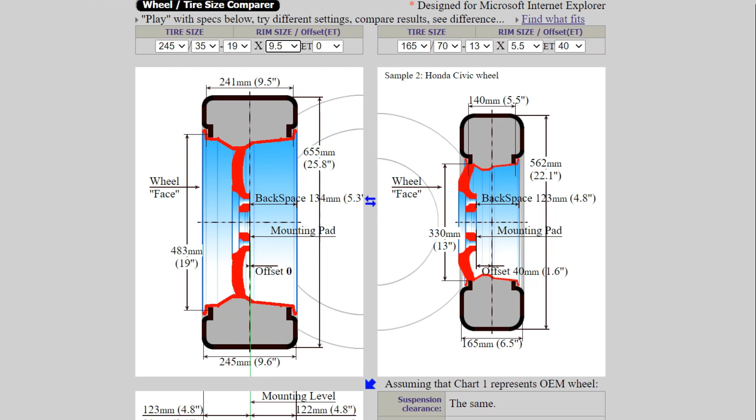ET — this is what we call offset. A lot of times you'll see 0, 35, 50, things like that. When it's at 0 offset, if you see this line right here, that's 0 offset. It's in the dead center of the wheel.

What happens when we do this? Let's go to -20. You see how that moved? The center portion, where the wheel actually meets the hub, is now inside the wheel more, which in turn pushes the wheel itself out more. Now if we go to the positive number, it does the exact opposite — we're actually 20 millimeters out more, which pushes the wheel 20 millimeters in more.

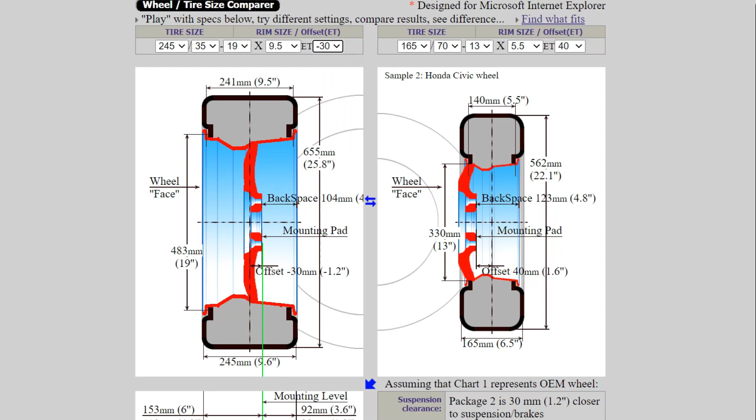I'll show that again just in case it's confusing. So 0 is center. If we go negative, let's go -30 this time — that's 30 millimeters in more where the wheel actually mounts to the hub, which results in the wheel sticking out 30 millimeters more towards the edge of the fender. If we go positive, it's the exact opposite: the center of the wheel, where it meets the hub, goes to the outer edge of the wheel more, which ends up pushing the wheel inside the fender more.

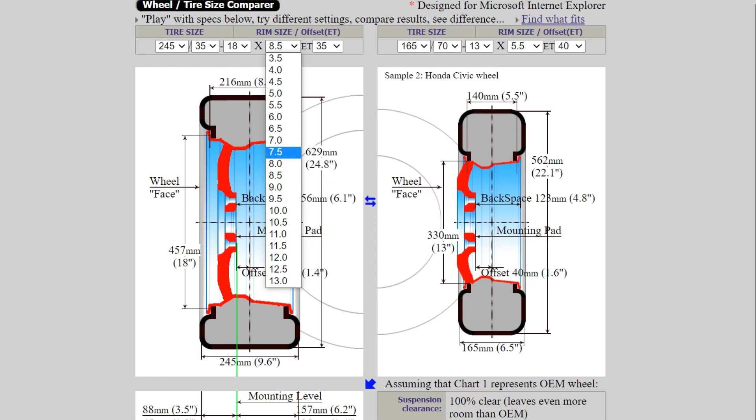So let's say this is your vehicle right now, and your OEM setting — the most common setting would be about 18 by 7.5 with 225 tires on it. Pretty common size. Now you want to put some 19s on your car. How do you go about doing that? Let's go to the right here and take a look at what we can do. First thing we can do is put 19 in it.

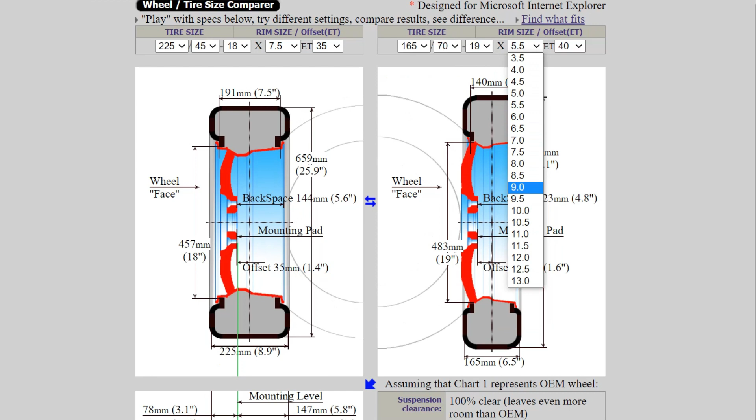You want to jump up an inch on the width, right? You're doing an aftermarket wheel, so might as well go a little bigger. But now you got to figure out what tire size you want. So let's see, we plugged in a 30 sidewall on a 225. We're off quite a bit on the overall diameter of things.

So let's see, 35, 40. Notice this right now, the tire size, 225/45 versus 225/40. If you read it up to just here, the tire on the left should be taller, right? But the tire on the right is actually taller because it's on a 19-inch wheel versus an 18-inch wheel. So 25.9 inches tall versus 26.1 inches tall.

So if you want to put it on a 19, notice how we went down by 5% on the sidewall. That's going to be probably your closest bet, because if we did a 45, just like we did on the OEM sizing here, you're jumping up by almost a little over an inch on the sidewall, and you'll run into rubbing issues and, of course, the speedometer issues as well.

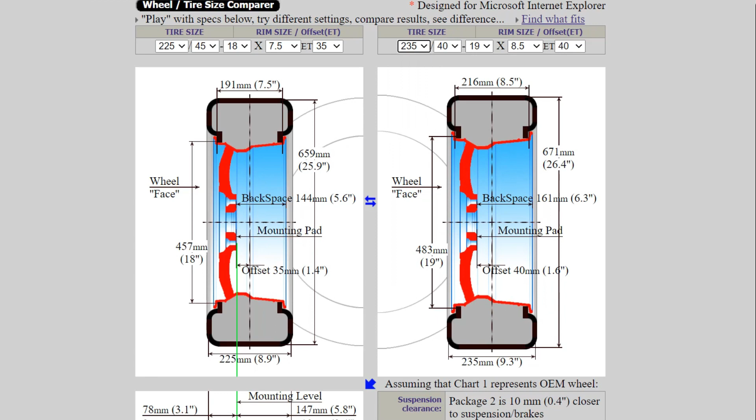So now this also changes. Let's say if we decide to go a little wider on the tire, so we decide to go to 235s. Now because it's 40% of 235, look how much the overall diameter has changed.

So maybe it's time we jump back down. Hey, look, now we're actually smaller than OEM. You think we can go a little higher? 245/35/19 is now as close as you're going to get.

Okay, so right now the perfect size for upgrading your 18x7.5 to 19x8.5 would actually be going a little wider on the tire, 245, and actually smaller when it comes to the sidewall, to a 35% instead of 45%. So overall diameter, you're looking at 25.9 on the OEM. The new setup is going to be 25.8. So your speedometer and everything should be very, very close.

So if we scroll down here, it'll tell you exactly what it's going to be. So when the speedometer reaches 60 miles per hour, actual speed will be 59.6 miles per hour, 0.7% off. So basically your speedometer will work the way it was intended.

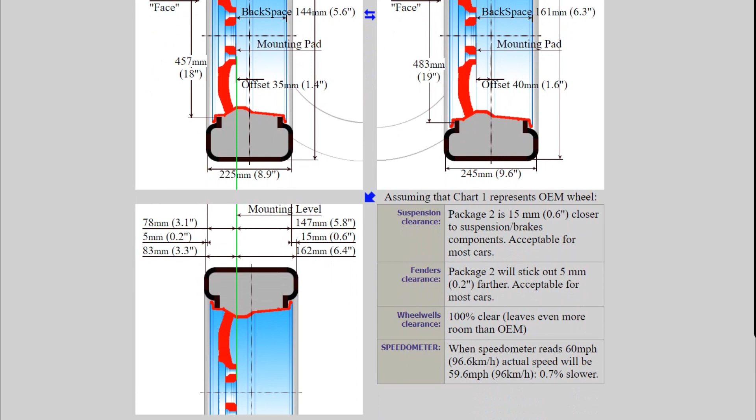Now, if you look here, it also tells you right now the package 2, which is the wheel that we did on the right side, is 15 millimeters closer to the suspension and brake components, which is acceptable for most cars, and that happens because it's an inch wider than the OEM wheel. It says it will stick off 5 millimeters further. Let's say you actually want the wheel to stick off 15 millimeters further.

So you look at your offset here, we're at 40. So in order for 5 millimeters to get to 15 millimeters, we need 10 more millimeters. So we take 40 minus 10, 30. Let's scroll back down, see what it says. Package 2 will stick off 15 millimeters further, acceptable for most cars.

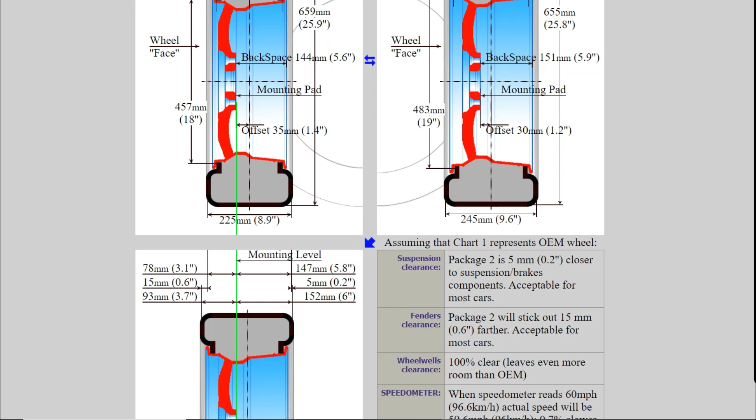So this is how you determine what offset, what width, what tire you want to run without compromising how the car behaves. So you don't have to worry about your traction control going all haywire, because usually that is actually caused by messing with the overall diameter of the wheel, which right now we're as close as we're going to be to the OEM specs.

Okay, now this applies to your front and rear wheels. So even if you have a staggered setup, you could always change this to your OEM rear wheel setup and then figure out what your rear wheel is going to be for your aftermarket setup.